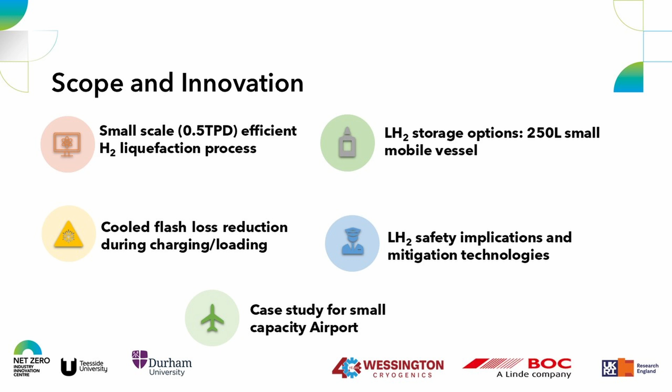In addition, we are looking at the supply chain of liquid hydrogen for the small-scale airport application - what happens if we liquefy hydrogen at the airport and transport it from one device to the other, to the airplane. What kind of process happens, what are the safety implications, how we can manage it, and what are the supply chain issues within the airport for liquid hydrogen.

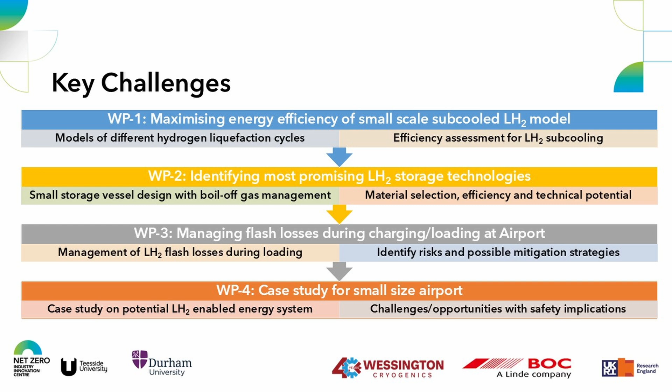So this is all about the scope. The first work package is defining the thermodynamic models for the small-scale liquefaction of hydrogen. The second work package concentrates on the design of a small-scale vessel for the storage of liquid hydrogen. The third is how we are managing losses of liquid hydrogen when transporting it from one vessel to another, how we can minimize those losses, and what are the safety implications with respect to this application for the airport.

At the moment, we all know that liquid hydrogen has more energy density compared to gaseous hydrogen, and we know that it gets liquefied at minus 253 degrees centigrade. That's the most cryogenic condition we have to achieve, 20 Kelvin.

We are going beyond that, and we are developing a model for subcooled liquid hydrogen. Instead of saturated conditions, instead of just liquefying it, we are subcooling it so that we can have a stable condition of liquid hydrogen during storage.

In addition, we all know that during liquefaction there are different isomers of hydrogen, ortho and para, and we have to work across those isomers too, so that we have a stable form of hydrogen as para-hydrogen, which should be 96% at storage conditions.

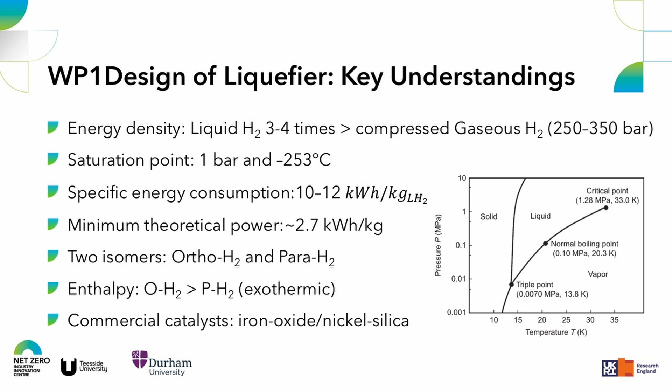A lot of energy is required to achieve these cryogenic conditions, and the theoretical amount of energy is 2.7 kilowatt-hours per kilogram of liquid hydrogen. Our energy requirements in real conditions are much higher, and we are trying to reduce that energy requirement for the system by defining different thermodynamic models for a liquefier of that small capacity.

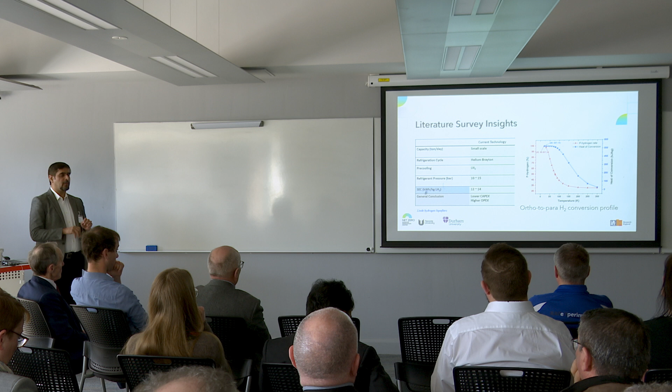What literature tells us is that for small-scale liquefaction of hydrogen, we generally use the helium Brayton cycle. That's a thermodynamic term for how different units in a plant are combined together so that we can attain liquefaction of hydrogen. We are working by playing with those units so that we can develop a mixed refrigerant cycle or a different cycle so that our energy requirements are reduced for the system.

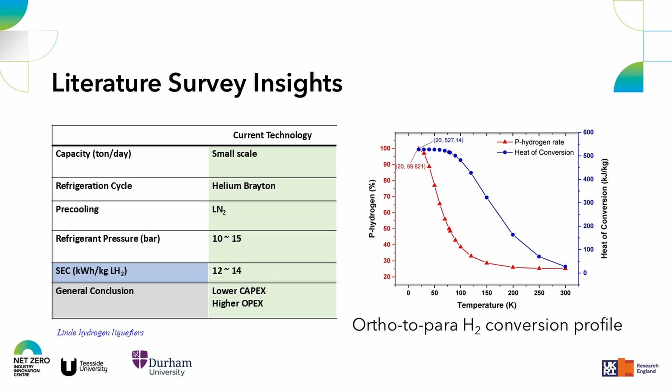In doing so, we are doing modeling work using process simulation tools of chemical engineering, Aspen HYSYS and Aspen Plus, and we are making assumptions for the minimum temperature approach for the heat exchangers in our cold boxes, which is 1 to 2 degrees centigrade, with efficiencies for moving parts at 80%, and a pressure drop of 10 kilopascals for the system.

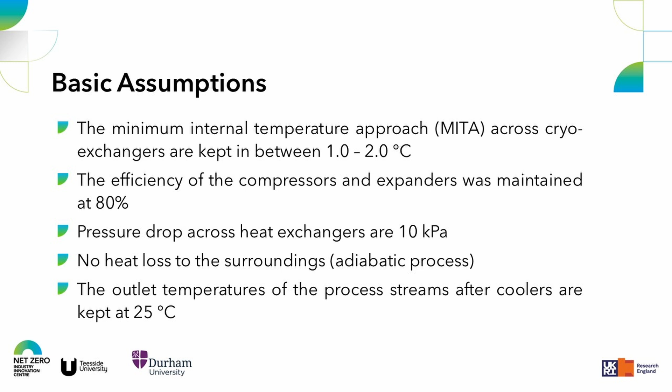We are assuming there are no heat losses with the environment at the moment - the system is adiabatic - so that we can first do the analysis and then check it with the real system, and then we can play with the numbers.

In a heat exchanger, we generally have to constrain our system by the temperature approach, the difference in temperature between the cold and hot streams, and we are playing with these numbers so that we can achieve a lower amount of energy in our system.

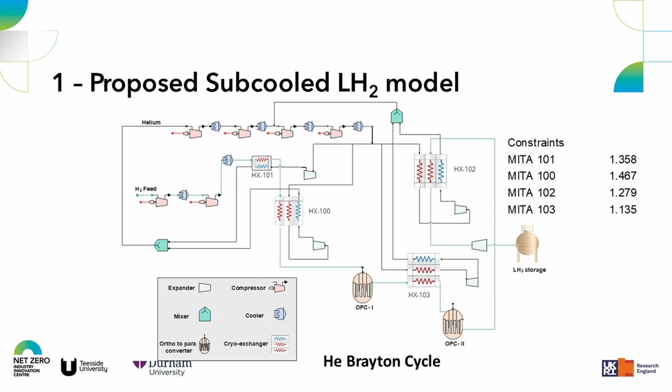Our capacity for the system is 0.5 tons per day, similar to the capacity of a small-scale airport. We are maintaining the hydrogen at a para percentage of 96%, and the pressure of liquid hydrogen at 1.2 to 1.5 bar.

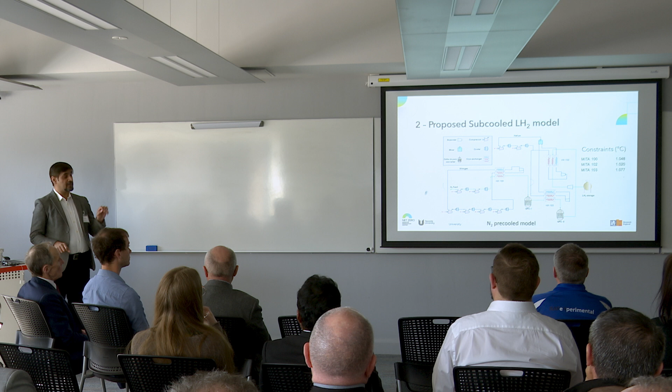We are also examining a different system in which we use nitrogen as a pre-cooling component and then helium as the refrigerant utility, in which the number of units is reduced. We have two utilities, helium and nitrogen, and we are looking at how this will reduce our energy requirement for the system.

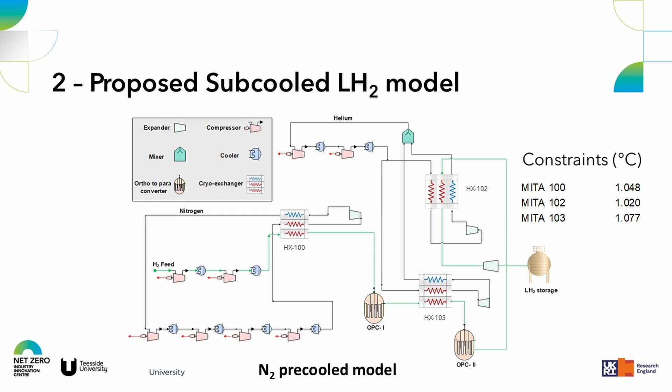So far we got some good results with these two cycles. With respect to the first two numbers, which are the flow rates of our cooling utilities, helium and nitrogen - in the first cycle only helium was used. In the second cycle the inventory is increased, but the net power requirement is reduced when we used mixed refrigerants like nitrogen and helium. Our specific energy requirement dropped manifold from 21 to 17 kilowatt hour per kg of liquid hydrogen liquefaction - a massive decrease when moving to other numbers of cycles and refrigerants.

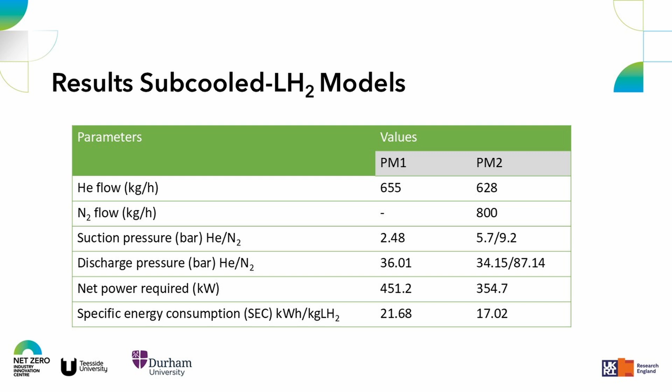So we are actually looking for other mixed refrigerants and trying to model them to see how much lower this specific energy consumption we can attain for the system.

In addition, we are also designing a small-scale vessel for liquid hydrogen, and there is very limited literature about the design strategy and methodologies available. The available literature is only about saturated liquid, which is just at the liquid state, not subcooled liquid.

In the literature, there is variable density multi-layer insulation system for the design of a vessel, or vapor cooled shield systems, but no literature about subcooled liquid hydrogen storage systems. We are actually trying to advance that literature so we can design a small-scale vessel for storage of subcooled liquid hydrogen.

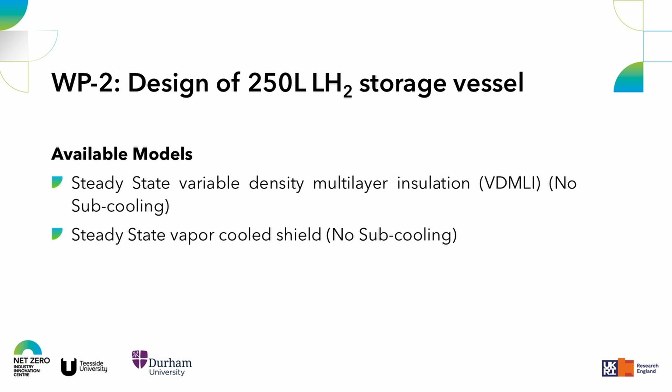The second is where we transport or move the boil-off gas - the vapor generated from the liquid hydrogen because of temperature gradients and other aspects - towards the annulus region of our storage device, so it can shield against the environment and reduce heat transfer effects, giving us more liquid in our storage vessel.

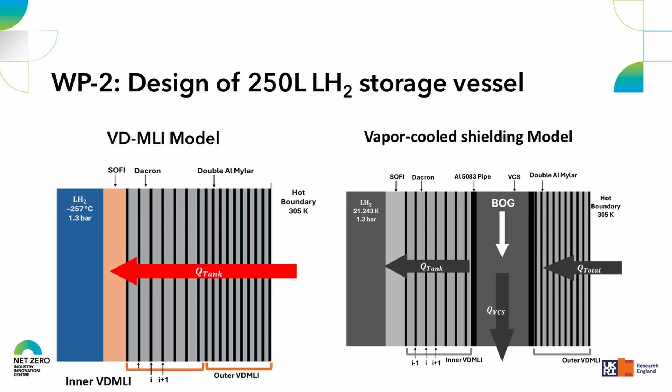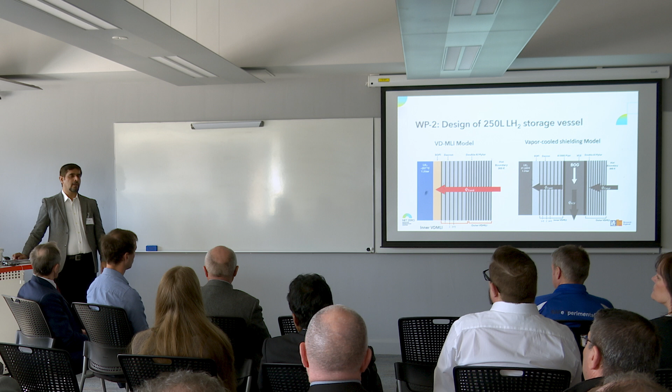So far we've reviewed what models are available in the literature, and we are moving towards advancing it for subcooled liquid. Hopefully in later stages we can come up with some good results with respect to that storage device.

The third item we are looking at is how losses happen when we transport liquid from one vessel to the other in the case of liquid hydrogen. There are multiple kinds of losses reported in the literature - one is because of pressure difference between the two vessels, or density difference, since one vessel may have liquid with different composition, temperature, or pressure. If we move liquid between vessels with this density difference, losses might happen and the liquid may vaporize.

There may be a rollover because of density differences in the system. There may also be a pump involved - as mentioned in the first presentation - and what kind of pump we should use when transporting liquid from one vessel to another, how this pump behaves, what the line containment is during transport, loading or unloading, and losses from moving machinery that generates heat, causing liquid hydrogen to be lost.

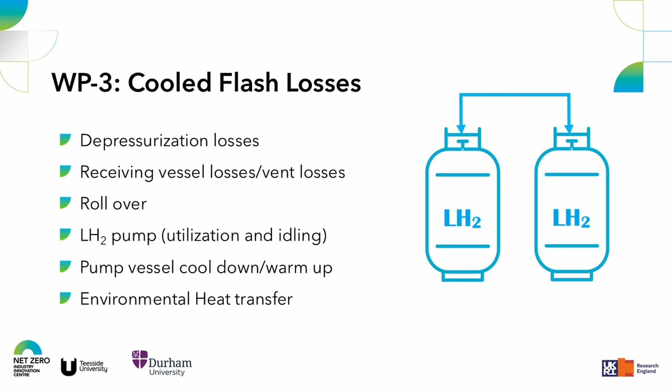The important aspect is the temperature gradient between the liquid hydrogen and the environment. That's the main issue, because liquid hydrogen is liquid at 20 K while our environment is around 25 degrees C. That's a major temperature gradient, because of which liquid hydrogen gets vaporized easily - we don't get the same amount we expect to get.

We are also looking at what safety implications will be there, especially with respect to application for the airport. We will use techniques we generally use for safety analysis, getting responses from our project partners and experts in these areas, so we know what factors to consider. Then we rate them and consider how these safety implications play when we consider liquid hydrogen as a supply chain in a small scale airport application.

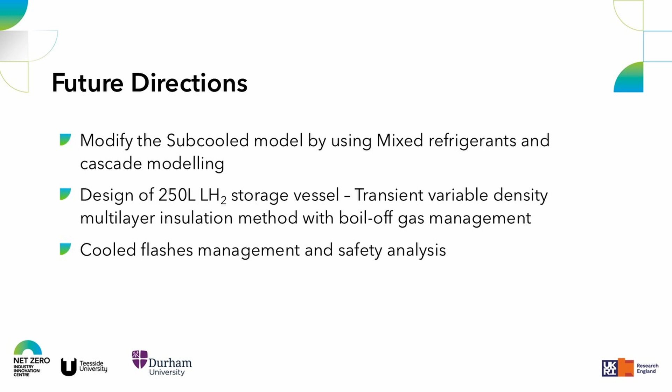In future, hopefully we will come up with more models for liquid hydrogen using mixed refrigerants or cascading of refrigerants, to minimize specific energy consumption, the design of a 250 liter liquid hydrogen storage vessel, and the safety implications of liquid hydrogen for a small scale airport. That's all from myself.